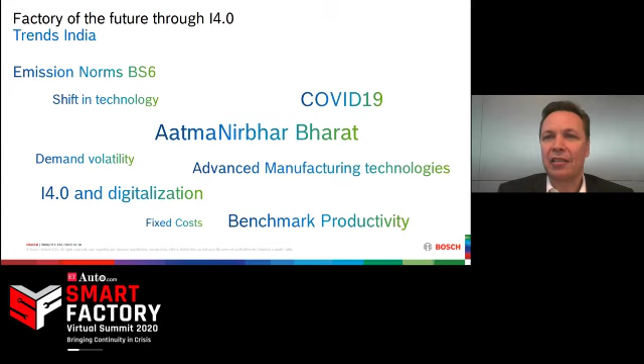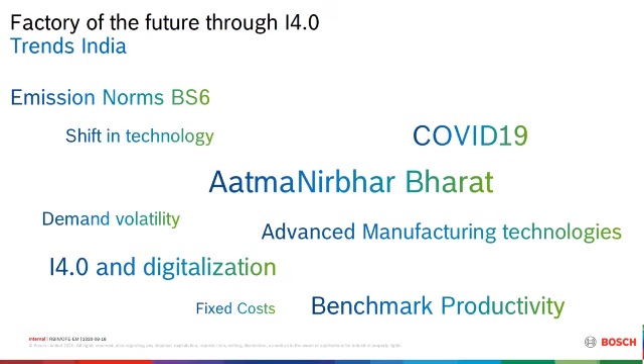And that's why also I 4.0 and digitization comes into the place. And it's not only being competitive here. I see India must be competitive on a world-class level, worldwide, on a global base. That's why also we at Bosch, we are thinking about how to become in our plants to a level, how to get to a level of benchmark productivity.

Hence, this year we have set up a comprehensive manufacturing strategy. And what is the purpose? The purpose you can see on the upper left is we want to make India a global manufacturing hub. This comes with a lot of statements.

And the journey to get there is about us. That's why we dot is a statement. We as leaders, we have manufacturing leaders, we have to make it happen. We have to do the necessary changes as well. And it comes with performance.

I mean, I come to this later maybe in our discussion. Performance level in India compared to rest of world, we need to close some gaps. And of course, here we need to do something different as well. And it's about transformation, because coming from conventional products to new products also, we need to adjust our resources first before we come to performance.

We need to transform. And if you look at the set of 12 strategic action fields I have defined, you can find connected industry as one pillar, but it's not standalone, because only connectivity and digitization will not help to make our manufacturing successful. It comes also with a clear thinking about lean manufacturing as a base, and built on that, digitization will help to develop our organizations towards a data-driven improvement organization.

So, of course, today I want to speak about connected industry. And for this, for each of these action fields, we have also formulated some kind of strategic guidelines. If we talk about connected industry, there are three aspects we need to focus on. At least this is what we define for our strategy here.

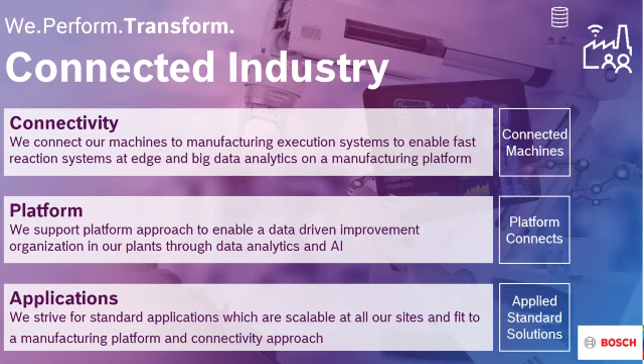I would like to start with this picture because it's really important to understand: improvements are still made by people. People is on the right side, and you can see the user groups are completely different. We have the top management, how I look at it, as responsible for manufacturing and quality at the India level. I'm interested in having benchmark KPIs everywhere.

But we also have our value streams, our shop floor management. They go into daily routines. They have to get the right data set, real-time available. We have manufacturing engineers doing improvements on quality issues, on productivity improvements. And we have some kind of data experts who do advanced data analytics, which is also key.

So the use cases are different, the users are different, and the knowledge and enablement of these stakeholder groups is also different. So we also have to think what kind of new skill sets are needed to really become a data-driven improvement organization. But key is the platform, the PS platform, which is a powertrain solutions platform, containing 3 pieces, and 2 pieces are very important.

It's the data lake, where we have unstructured data available for analytics and data mining. From the data lake, we also put data into the data warehouse, where we can do very fast and very clear analytics based on reporting factories.

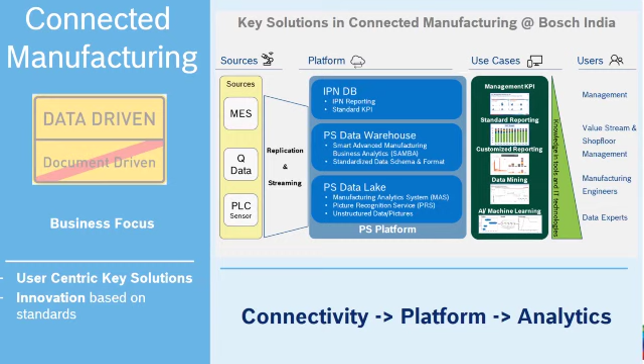But if the machines are too old, we put some connectivity devices, which we have developed here in India, for the rest of the world in powertrain solutions. So we put some sensors, PLCs and boxes to make them ready for streaming data into the platform. So the platform is something which is key, which must be a standard to make the data available for improvement processes.

But what we should not do is fail by only talking about technology. Technology is one aspect. If we really want to change to a data-driven improvement organization, which is very much needed to achieve top performance, leadership must also change.

It starts with me, with my colleagues, deploying this kind of strategy. We must drive it from the top. We must have a clear strategy of data insight. It's not about having data - we are data rich, but sometimes data insight poor.

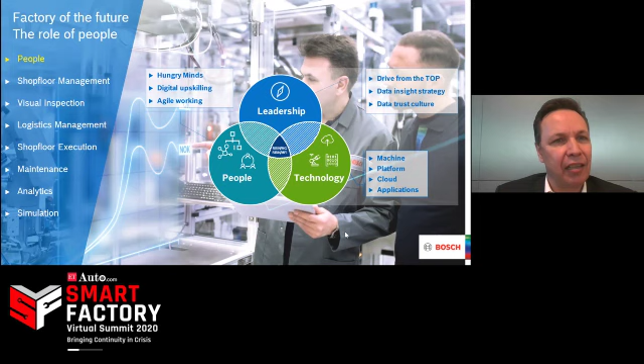So we need to build a kind of data trust culture, and it comes with quality of data as well. So we need to think much more about which format and which data model we need to deploy in our PLCs in order to become a data-driven improvement organization. This comes with clear leadership guidance.

And it's about the people I already mentioned. On the right side, the users are still decisive also in the next 5 to 10 years. Not everything will be decided by artificial intelligence, but we need to prepare the data and information much better so people can act faster on needed improvements and know exactly at any time where to act.

And here we also need people who are very close to data, who are really hungry to work with data, to work differently than we did in the past. For this, because we cannot change every single head in our factories, we need to do some upskilling. We have defined digital fluency programs to achieve this. And we need to work differently - it's about applying Scrum in manufacturing as a leadership framework as well.

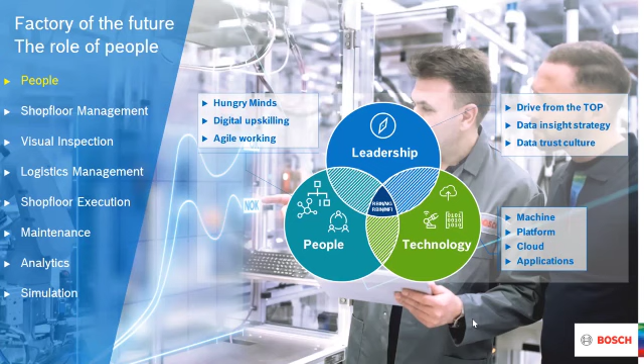Because if you have data on a daily basis, you also need to change your style of working. So many things must happen on the people side, while we are spending a lot of time talking about technology only. Technology is the enabler, but you must also change the way the organization is working. So it's a full set of changes.

And if you've seen in my strategy, the we aspect, passion is one field of strategic action fields. In this passion, we have also placed what kind of competency and what kind of change is needed to change the people and the way they work. But I want to give you a flavor of what we are striving at and what we are changing, starting with shop floor management.

Shop floor management is key. Being successful on the shop floor, close to the data, reacting fast, is key. And we have a quite good setup of KPIs and a shop floor management cycle at Bosch, which is established throughout the world in the same fashion.

But it's still paper-based, it's manual, it's good to have it. But you can see already in most of our plants, we switched over to the middle, simply changing from paper to paperless, to be real time, to prepare standard data sets generated automatically, and discuss on the shop floor only digitally.

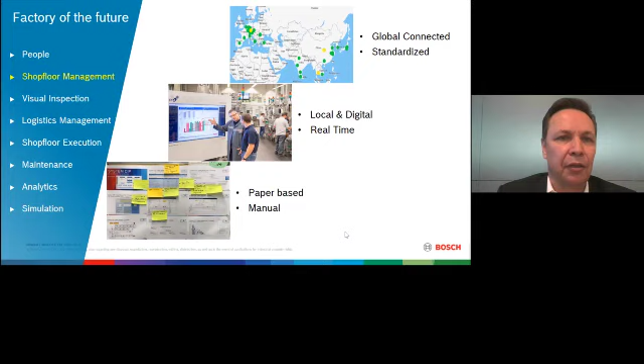So you can see here Active Cockpit, which is also a product sold by Bosch. You can buy it also as an external company. But this is what we are using to do the shop floor management, and all the data will be available.

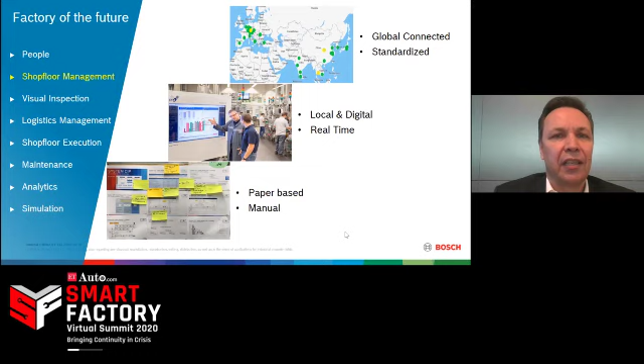We made an analysis, so you can save a lot of focus on indirect personnel who were preparing paper in the past, by just using automated data, and focus more on improvement work.

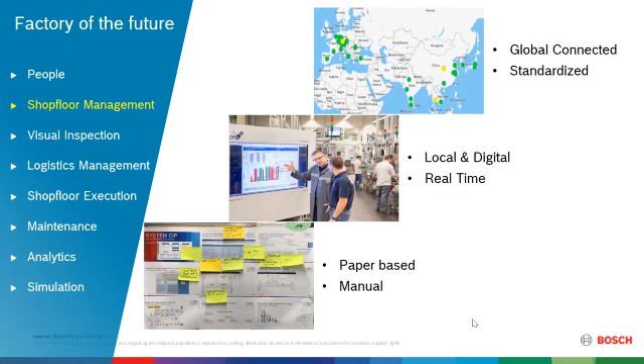And on top, we are already doing this: because we have this data, we have these active cockpits on our lines, we can do worldwide comparisons all over our international manufacturing network, compare lines down to the level of single stations, do benchmarks, and make sure all the lines are running on the same performance level. This is also a good tool to distribute improvement work all over the world, while everybody participates and benefits from the solutions.

A big field is visual inspection. You can see this specifically in our plants here in India. Normally you have these manual processes, going into microscopes or using paper-based guidelines.

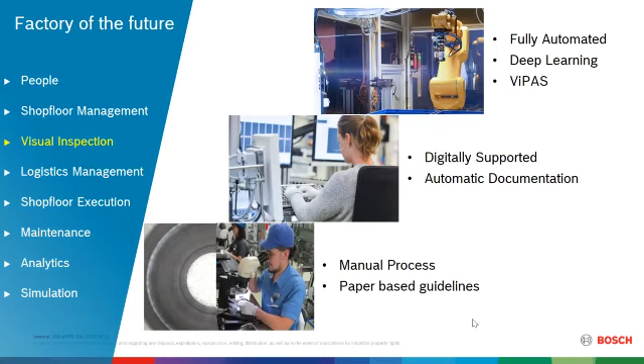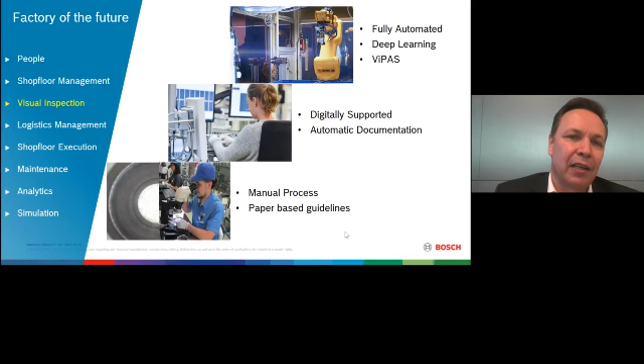Recently, we have semi-automated visual inspections where the machine makes proposals to the operator, saying 'I propose this one is a good one,' and the operator must confirm, because this is a very advanced visual inspection. So we have this kind of small artificial intelligence already implemented in our manufacturing.

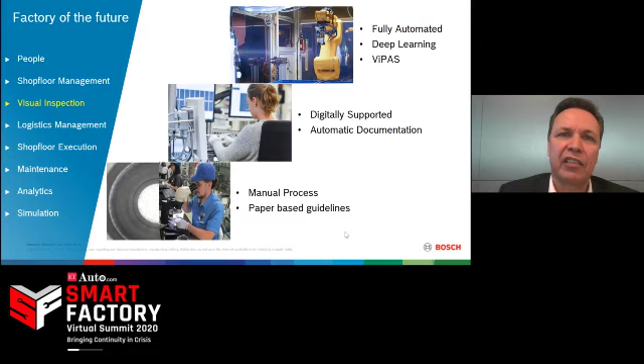But we already go one step beyond: we have fully automated deep learning based visual inspections. Just to give you an impression, worldwide, only in Powertrain Solutions, we have 1,600 visual inspection workplaces operated in 3 shifts. Automating it and bringing it to a higher level of automation also comes with quality, as AI algorithms today are much more reliable than manual inspections. So this kind of evolution will take place.

Same in logistics: as we have manufacturing execution systems, we also have logistics execution systems implemented. So we are already in the middle of the picture on a case by case basis. Forklift transportation is over. We have digitally supported milk runs running highly flexibly, getting clear hints on where to go, where to pick, and where to bring the parts.

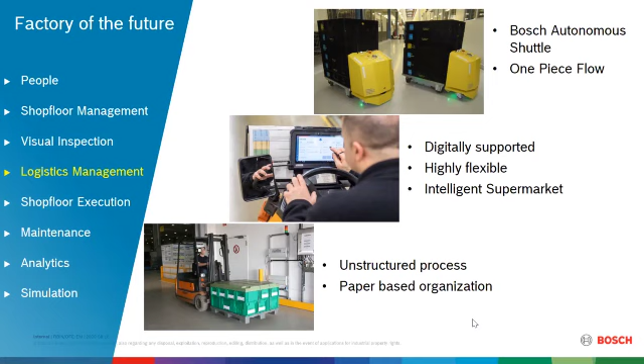But we already developed in-house autonomous shuttles, based on LiDAR systems, finding their way on their own, based on swarm intelligence and in-house GPS, bringing only small batches. This is also something of the evolution we can see. When we'll see this in India, I don't know. Of course everything is based on economics, but the first step, for sure, we will see very soon, and we have already implemented it in some of our key plants here as well.

The same comes with robotics.

Of course, still our lines here in India are very much manual driven. And here it's all about bringing excellence into these manual driven lines, having the right lean line designs, one-piece flow thinking, high level of standardized work where we are by far not benchmark.

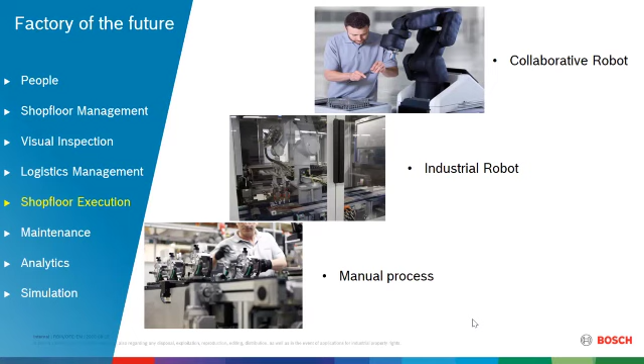But we are going more and more into advanced manufacturing, like many countries have done this journey already. Just thinking about China, industrial robots are the next step. But of course, looking into manual lines, collaborative robots are the robots of choice. We are already implementing collaborative robots here in India in some of our lines in order to try how we can drive hybrid manufacturing in our manufacturing surrounding. This is one thing I feel in the next years will come more and more, that people and machines work together really hand in hand.

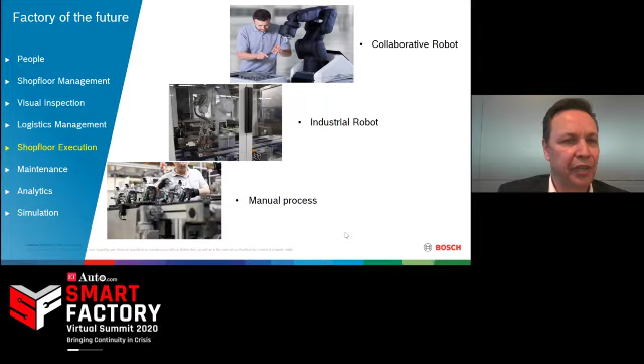Maintenance for me is also a passion and something really important, very much manual driven. In the past, in most cases, we simply have an ERP system like SAP where we do all the ordering. But now this is an element of our manufacturing execution system already. We have a maintenance support system which supports and guides digitally all our maintenance guys through their journey. They're just going out with a laptop, they have the problem solving, everything on hand. They can order directly spare parts from the machine without going back to the storage. So it's a full comprehensive system where they can open and close maintenance orders on site without going back and forth to the maintenance center, and this saves time. Here also it's all about efficiency.

The next step, specifically in our new machines built mainly in-house in our machinery departments, comes to predictive and augmented reality. All these new machines we have in 3D drawings already, and also the PLC and the programming is incorporated in this. Hence we are able today, if we face line stoppages with augmented reality, even untrained operators will be able to identify the point of the problem, and this will enable people of today to do much more autonomous maintenance, which is currently done by specialists. This is a big benefit which will come in the next years, making unskilled people feel much more skilled just by using the human machine interface and good guide.

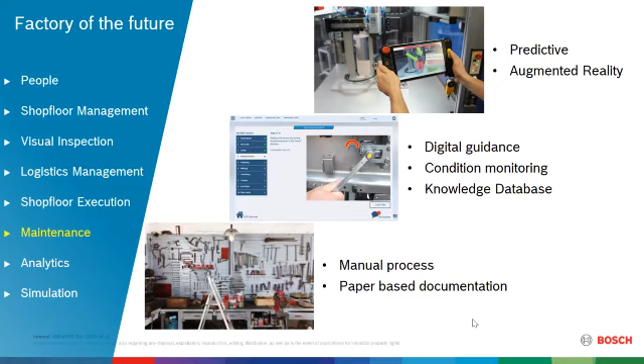And of course, I talked about platform thinking. Very often, specifically in quality problems, we work on huge Excel-based reports trying to find out some kind of data. This is time consuming, we have to copy from left to right because we don't have centralized databases. We will change this with our platform approach so that all data is available in one place with regards to one product and worldwide manufacturing, so that we can do all these analytics much faster.

We can also implement, based on real-time data, some rules. We have some rule machines developed with our Bosch Innovation Cluster Artificial Intelligence, which we have here at Bosch in-house, so that based on this data we can make some kind of decision, some trend analysis, and give some hints to the people. If you look into the third step, we really use artificial intelligence for self-regulating processes, which we have stepwise in some of the very advanced machines. This will be the future, that based on trend analytics and non-written rules, the machine itself gives hints that something is going wrong, so that we can act accordingly.

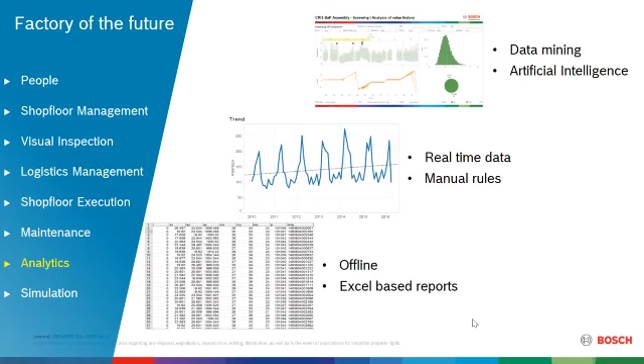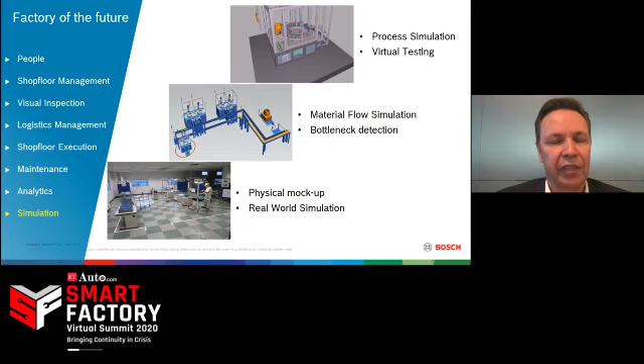And last but not least, building up new machines is also important. How do we invest in the future? Of course, what is standard at Bosch is that we do physical mock-ups of new lines, mainly cardboard manufacturing, so people can try the new line on a cardboard mock-up, learning by doing, optimizing cardboard before we build the machines. But recently we went over to material flow simulations and bottleneck detections. This is the base for the new planning, so every new machine should be mirrored in this digital model in order to find out issues at a very early stage.

We will face problems with regards to material flow, buffering, and so on, to start very fast on a very high level of OEE in the ramp-up phase already. And of course, the last step, these are first trials we're doing, is that all the machines are in the 3D model, as I already mentioned in the maintenance part.

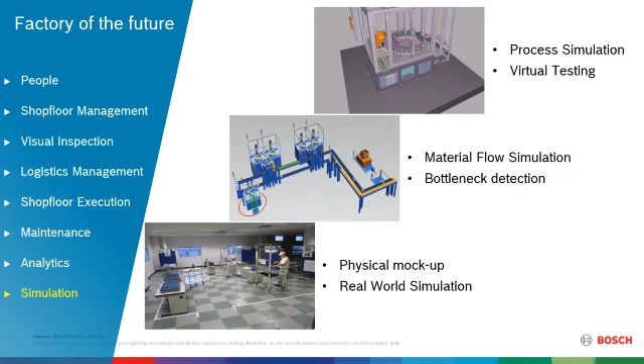I mentioned programming of the PLCs already in a digital base. So when the machine is there in steel and iron, we can just copy the software and the machine will run very fast, so we can reduce the lead time of machine build also by 20 to 30%, investment also by 10 to 15% by doing so. So this is a prerequisite now for us, how we plan and do investments.

All in short, you can see what's important to me. Data-driven improvement organization is a target condition we must arrive at. It comes with connectivity, it comes with platform thinking and analytics, because this enables all the examples I've shown you. Artificial intelligence driven is only possible if you have a clear picture where to store the data, how to store the data, and how to build the algorithm based on that, and then make use of it in the supply chains.

So this was my input. I wanted to give you a short journey. Over to you if you have some questions. I'm happy to answer them.

Thank you so much, Mr. Mueller, for giving such a detailed and insightful presentation. So I would like to understand more about connected manufacturing. Why is it important in today's time, and what can manufacturers really achieve by implementing this technology?

I give you a simple example. We are transforming now from internal combustion engine to electrification. Electrification is more, let's say, a commodity. If you want to survive in this kind of market, you must perform with your whole manufacturing at the top benchmark level of performance. Where does benchmark performance begin, for example? If you have OEEs on your lines lower than 90%, yeah, you're far away from benchmark. So we must really readjust.

And I learned this during my stay in Japan, really hard. Between 90-95% you must be. The question is, can you arrive at this high level of OEEs without having this clarity on details? And my answer is maybe, but if you have Industry 4.0, you get this transparency, very detailed, you get all the data you need to really identify the things that need to be done to arrive at this benchmark performance level. So for me, it's no option to miss that out. If you want to stay successful in the market, we need to do it this way to really come to this benchmark performance level.